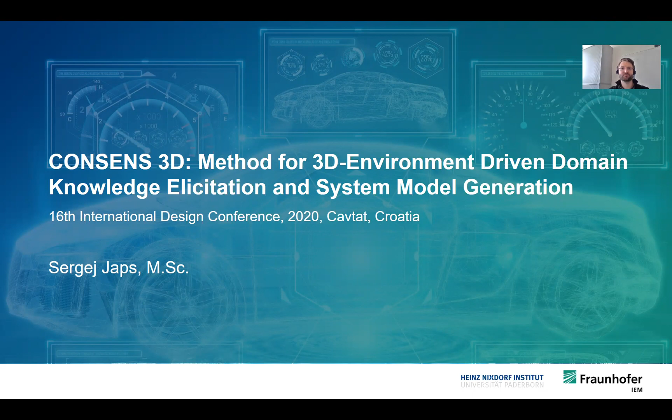My name is Sergej Japs, and I'm mainly working on research in industrial projects in the automotive sector in the context of MBSE and requirements engineering. I'm working as a research associate, and I'm working on my PhD since 1.5 years. In total, I work on systems engineering and requirements engineering topics since 7.5 years.

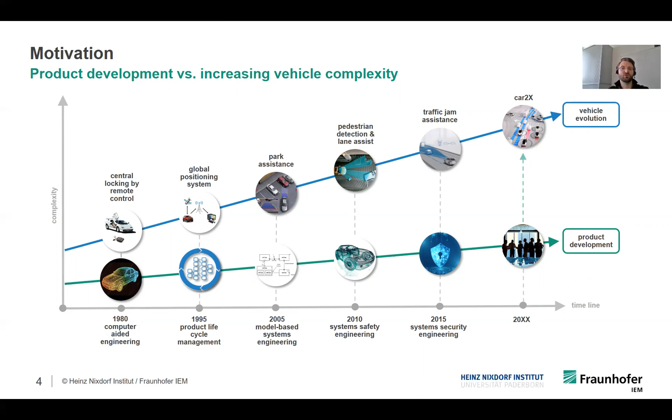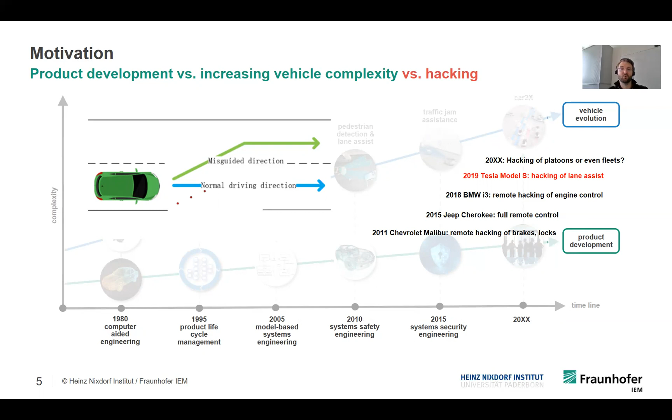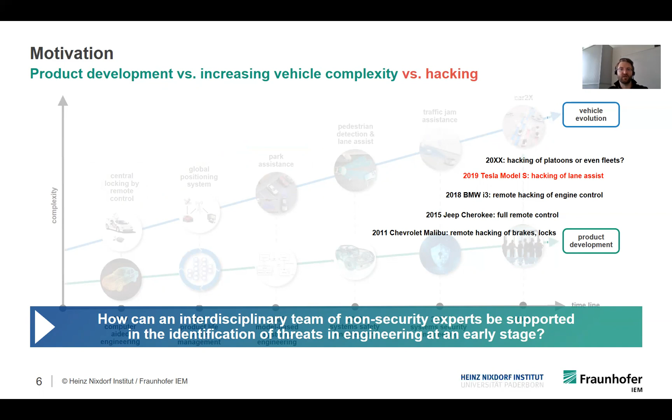There are already a number of hacks that have been performed on modern vehicles. An example: in 2019, security experts demonstrated the manipulation of the lane keeping assistant by just placing 3 stickers. What's next? Hacking driving vehicle groups or even whole fleets? My research question is: how can an interdisciplinary team of non-security experts be supported in the identification of threats in engineering at an early stage?

Suppose we want to add new functions to a safety component integrated in the vehicle, such as the Advanced Driver Assistance System. With MBSE, you can create a black box model of the vehicle, identify relevant environmental elements, and identify use cases and threat cases like automatic braking, slip regulation, or emergency communication. In my institute, hundreds of such workshops have been successfully held with industry participants from a wide range of sectors. I personally have held 10 such workshops so far.

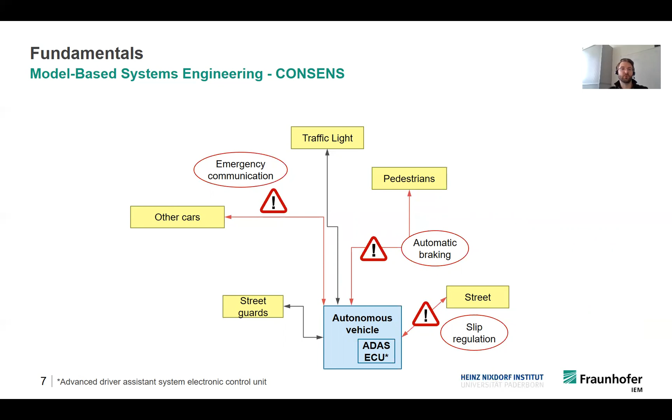The problem with these workshops is that implicit knowledge of individual experts is not extracted for the whole group. Using a 3D environment, situational cognition, which means remembering, acting, and thinking in context, is made possible for the participants. By using MBSE in the 3D environment, the extraction of knowledge for the whole group is made possible.

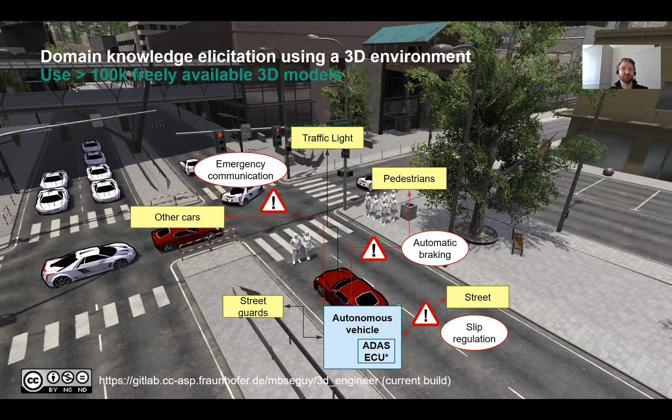Our prototype, 3D Engineer, enables model-based systems engineering in a 3D environment. Place objects in a 3D environment, identify use cases and threat cases, identify relationships between the system and its environment in form of a structural black box model. In the shown case, there is an example of a relationship between the silver vehicle and the pedestrian, because the vehicle can detect the pedestrian by sensors.

Furthermore, 3D Engineer enables the capturing of specified sequences. The example shows the following specified sequence: if a pedestrian is detected, the vehicle must calculate the distance to the pedestrian and evade if necessary. In addition, the rear vehicle must be warned of this.

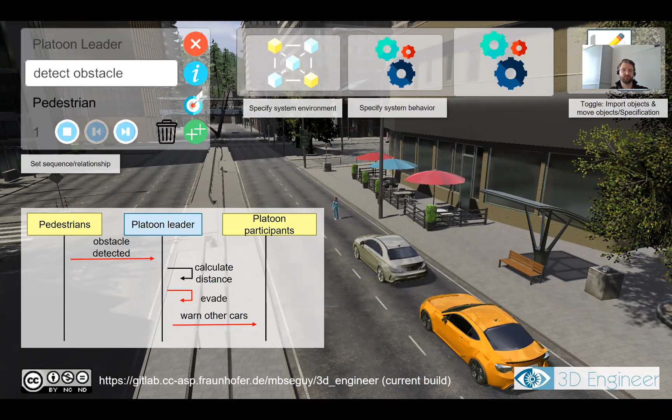The models implicitly created in 3D Engineer are extracted. After that, for further use of the models in the often used model-based systems engineering tool Cameo Systems Modeler, we have developed our own import plugin. We are currently testing the effectiveness of the method and tool based on the results of a project conducted over 5,200 hours with 130 master students.

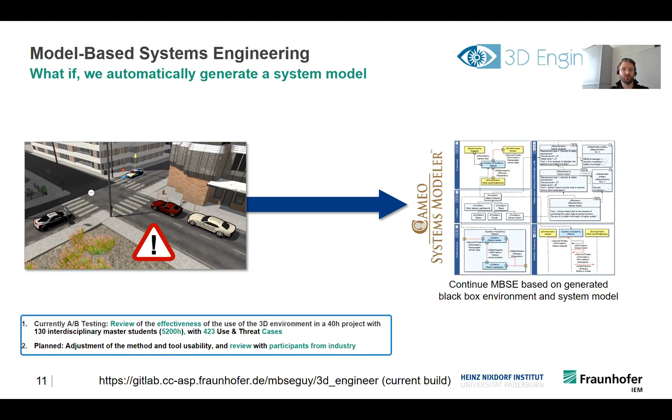We are currently developing a VR port to increase immersion. Furthermore, we are working on a collaborative use of the 3D environment. Finally, we plan to test the method and the tool in different environments, such as the production environment.